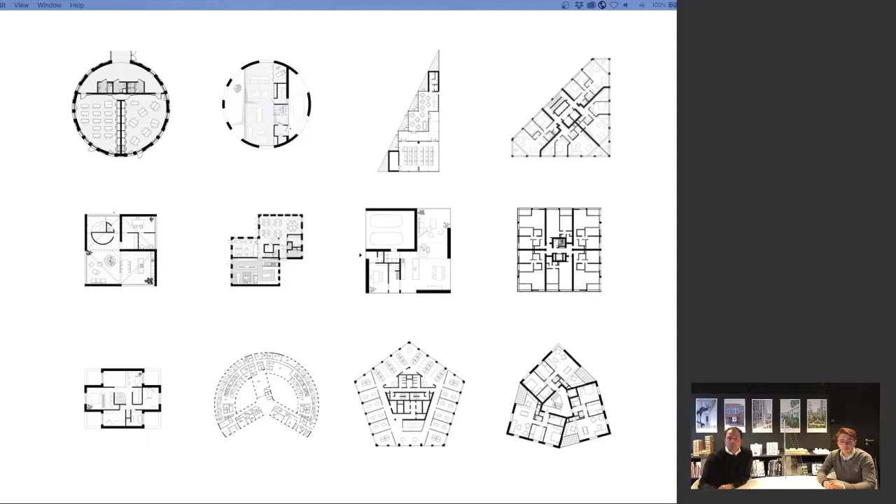So when we launched the office in 2012, we applied to 2 competitions. We won both, beginner's luck. One of them was the extension of a school in Bossière, a small village near Gembloux. The program was just to add 2 classrooms and toilet facilities to the existing school complex, so not too difficult.

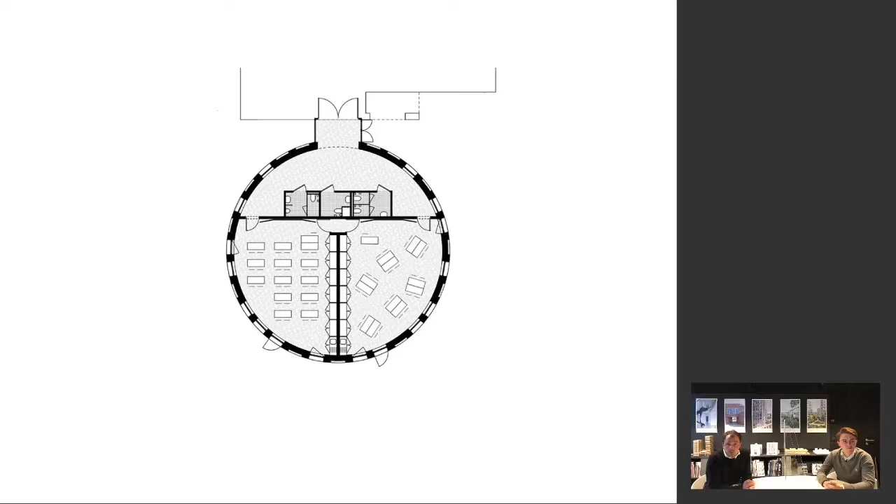As you can see, the shape of this extension is a basic circle. And to be honest, we didn't come up with this winning idea. The person who did was the officer in charge of the public procurement. Hello, Hubert. But you have to imagine a very serious guy, a technocrat who doesn't believe in fairy tales.

At that time, this guy could not imagine how his draft was so adapted to the context, and we couldn't imagine how he would contribute to our practice with this radical form.

Obviously, the shape offers many benefits. It offers the most compact form possible, the circle. It leaves more space to the external courtyard where children can play and run around the building.

And finally, inside, the curve also participates in the pedagogic scheme. It focuses the attention of the children on the board and of course on the teacher.

Another project with a geometric approach is the Left Side business park in Charleroi. The project has the ambition to become a new landmark in the city, the literal translation of the metropole with a big M, creating an urban theme.

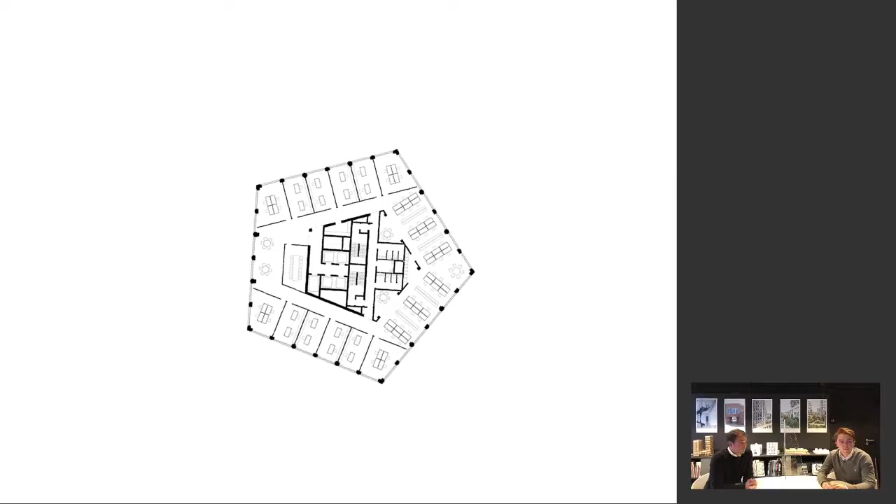Also, the 5 facades instead of 4 in a rectangular plan allow more offices to take advantage of natural light.

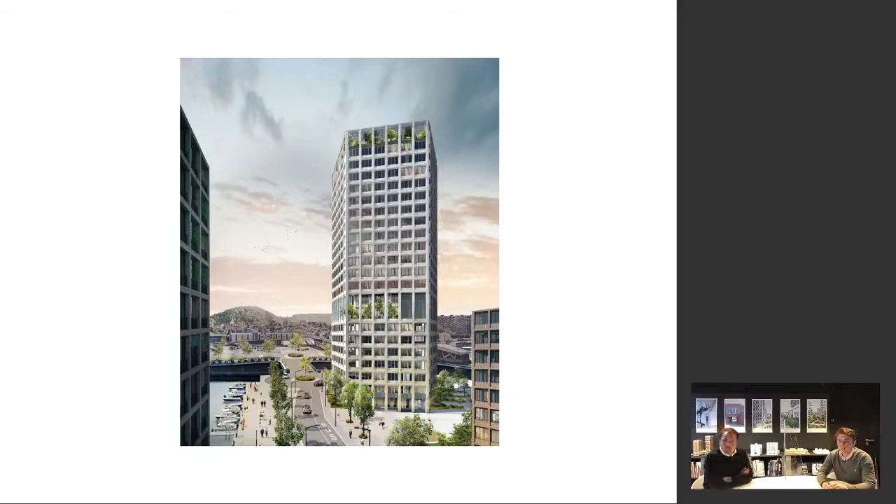The second typology is actually a triangle for the residential program. It is inspired by the Carolo shape of urban plots. So the benefits of such typology are the fact that every apartment gets a view over the marina.

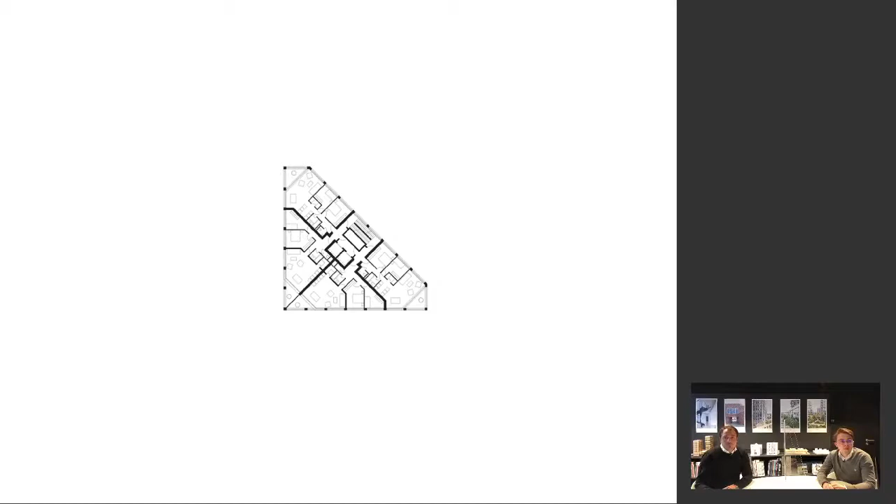Taking a look at this postcard of Charleroi, nobody could actually imagine that we are in Charleroi. So it's actually a good example of render manipulation.

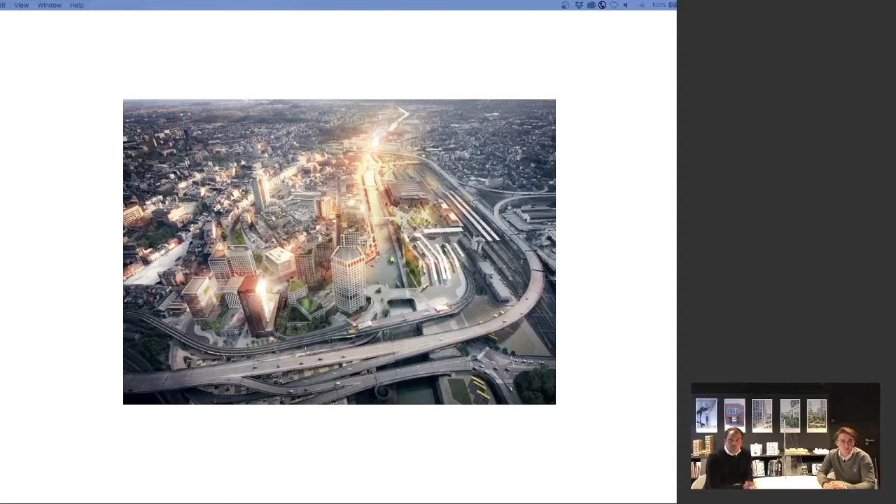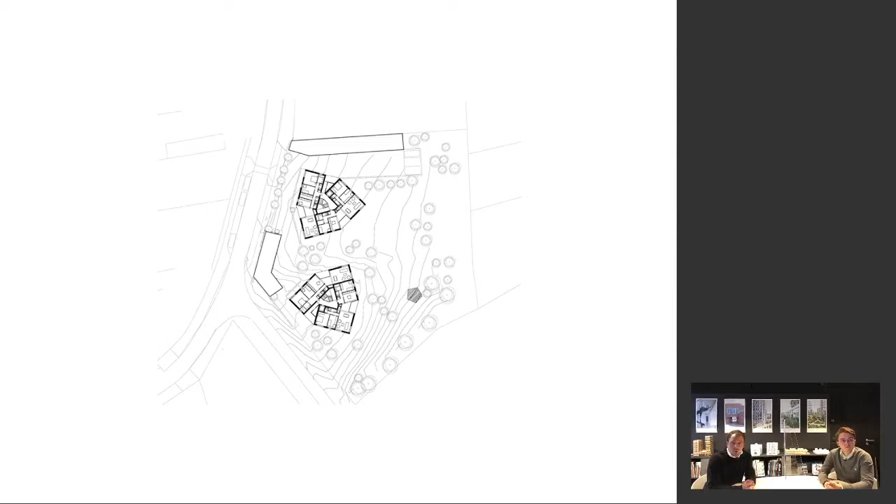This project is at the junction of two territories, the village and the countryside. The program consists of 2 blocks of 14 apartments. And once again, we use the geometric method to articulate this transition and offer porosity between these two territories.

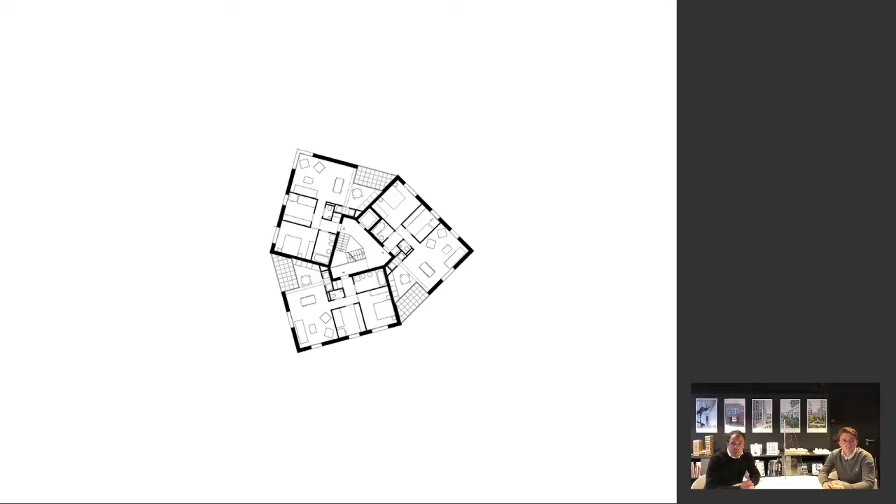But also, we were quite aware of the consequences of using such a complex shape on building the site. So we decided to soften the angles by changing them from 120 degrees to 90 and 150 degrees.

It allowed us to retrieve a certain orthogonality in the floor plan to ease construction by using prefab slabs. It also provides better habitability, and it's clearly easier to put furniture in a rectangular room, you know.

The opening of the building is only visible in the living room, which gives a specific dynamism to the space. And finally, to conclude this project, the geometric work in the central core creates an impressive space flooded with natural light.

In our case, we share the vision of Antoine Picon saying in French, 'si l'ornement a lieu d'être, il doit apparaître évident.' So it means that the ornament, as approached by the office, has to appear as an evidence.

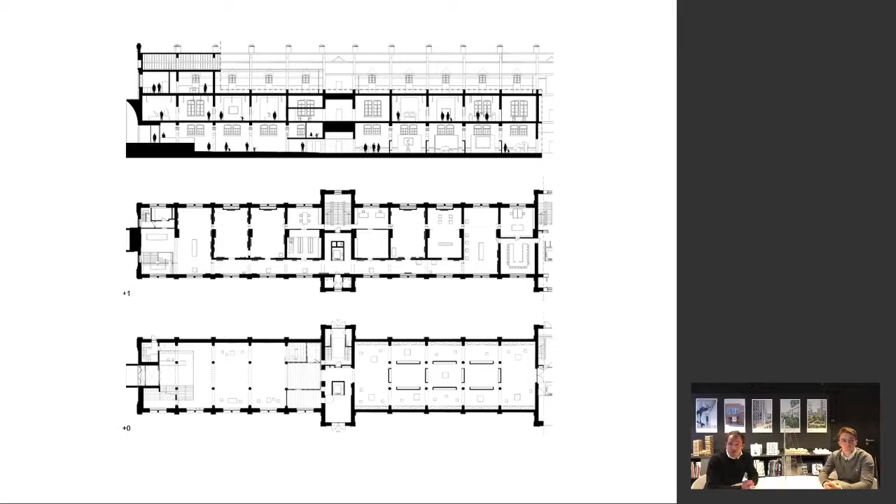Two features define the context of the project. The existing entrance of the heritage building, which didn't face the street, and the imposing presence of the police station designed by Jean Nouvel and MDW, which shines as a lighthouse over the city.

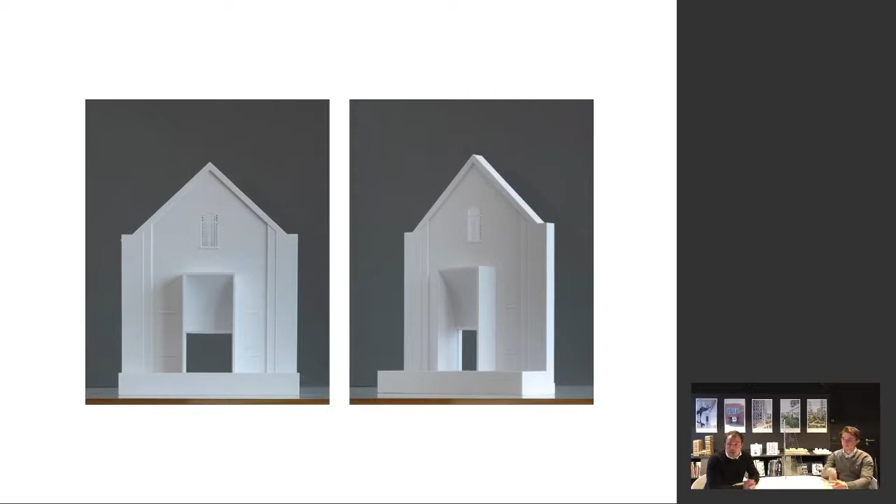We decided to draw a new entrance to give the building a strong image and establish a new relation with the public space on the street. A few years after winning the competition, this choice was confirmed by the deputy mayor when he told us that...

...for once we will not enter a public space in Charleroi by its rear, which is the case, for instance, with the town hall.

This entrance is directly visible from the street, instead of sharing it with the esplanade of the police tower. This door is actually our only intervention on the facade.

This important and exuberant entrance gave the opportunity to create a new monumental staircase inside. This intervention allowed us to reorganize the floors inside, previously independent from one another, to make them dialogue with this new grand staircase.

This approach provides real connection between the old stables on the ground floor and the first floors. The layers which were previously stacked up now overlap.

The project for the new headquarters of the Société Wallonne du Crédit Social in Charleroi is a good example of this type of approach. It's a winning project for a public bank that we conceived together with Meta and RGPA. The building is composed of 6 floors dedicated to the bank and 1 for social housing.

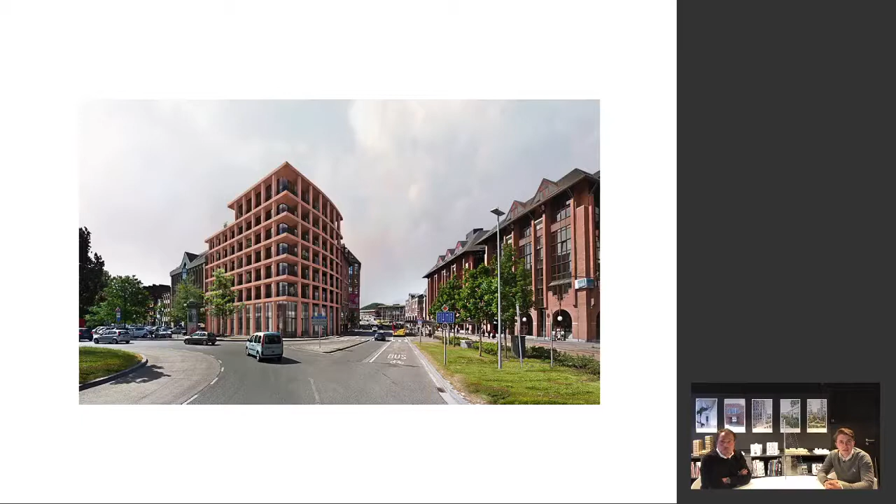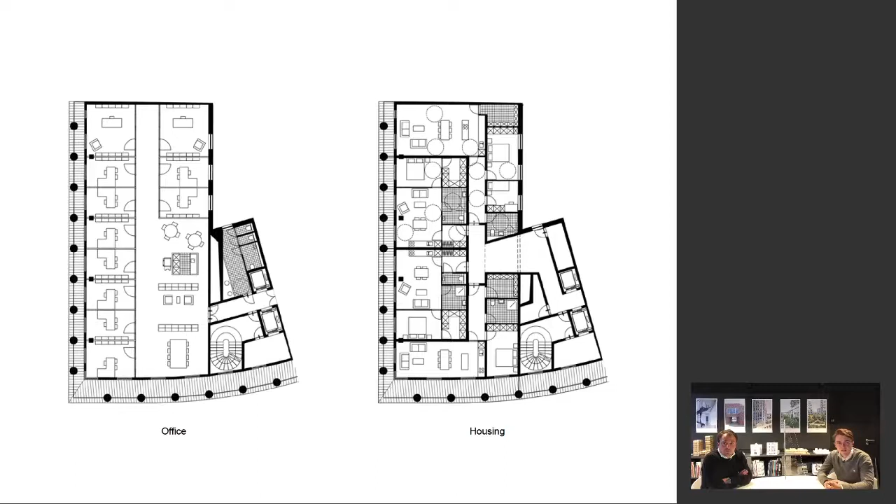The new building is approached in an ornamental way, using the same brick color to respond to the postmodern context around it, a style shared by a lot of public buildings in Wallonia. The ornamental dimension of the project is also combined with its great functionality. Maybe the architectonic shape of the building seems evident today, but the real partnership with Meta clearly helped us approach this sensitive conception.

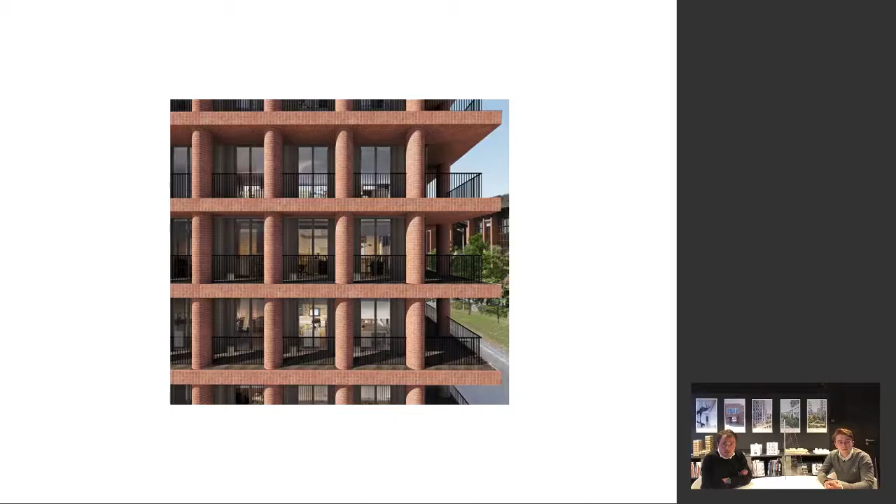To fit with the surrounding, a peristyle was imagined along the facade, playing with porosity and transparency, and also integrating public equipment into it. Somehow this aspect defines the social purpose of the SWCS, which is a social bank, in opposition to traditional financial institutions that are much more closed.

Finally, the facade doesn't take account of the variation of the program. It offers the same ornamental consideration for the bank and also for the social housing.

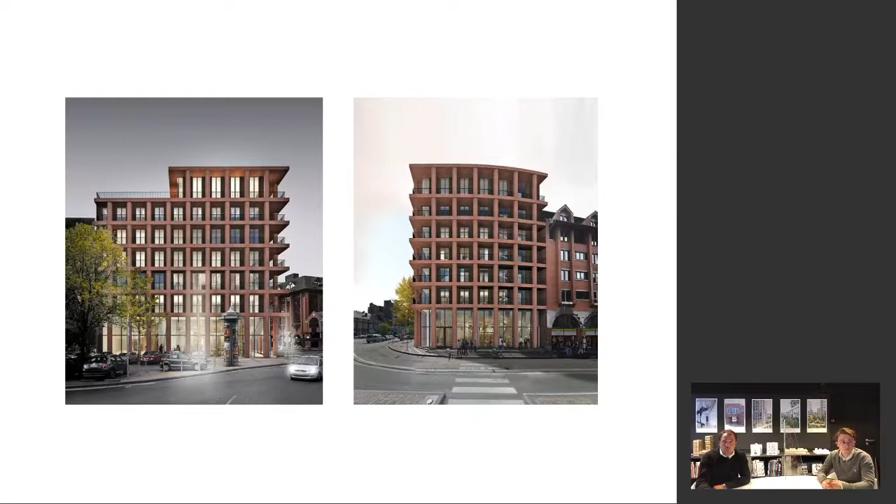This project of collective apartments takes place in Malonne, in Namur. The requirements of the project imposed us to complete the initial private housing program with social housing. First of all, it's clear that the project and its plan seem quite basic. However, it's the diversity of the program that we found interesting, despite the promoter's first purpose, meaning profitability.

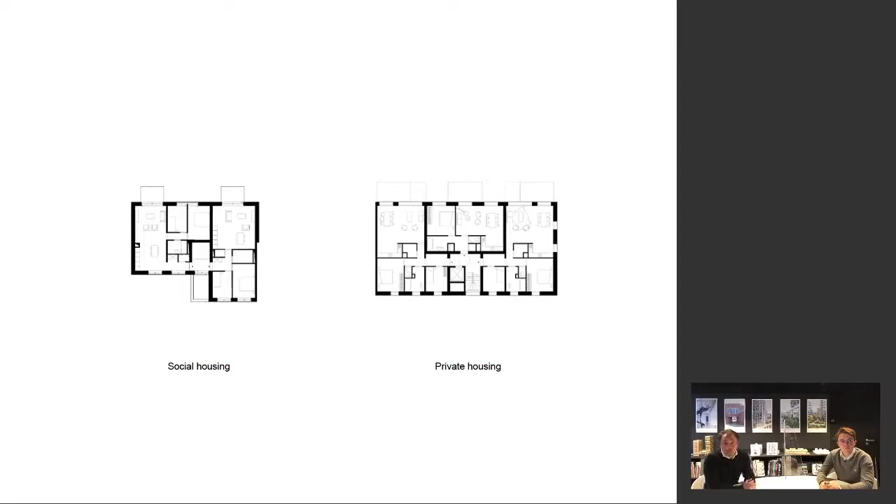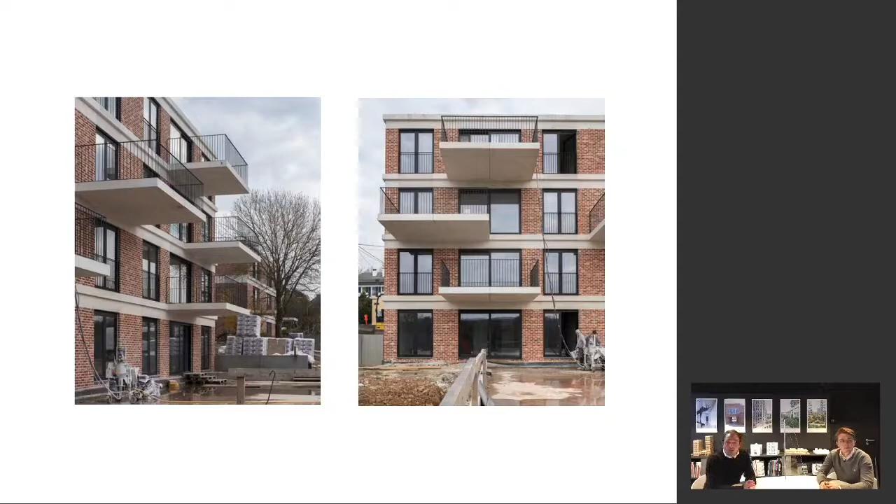Hybridization makes a society more organic. So to give a bit more flavor to the floor plan, we proposed a small coquetry on the facade using a frieze. The slab nosing unifies the salient elements of the building, such as balconies, lintels, and so on. It was important to us that both buildings, no matter their programs, receive the same coquettish touch. It aims to bridge the gap between the social disparities of its inhabitants.

The developer didn't consider the existence of these elements before starting the construction, as usual. At the beginning of the project, he just wanted the building permit to be granted. So when he figured out about these ornamental elements, he just wanted to put roughcast external coating instead.

It shows in this case that collaborating with developers often requires continuous negotiations, give and take, to find the balance between architectural value and financial profitability.

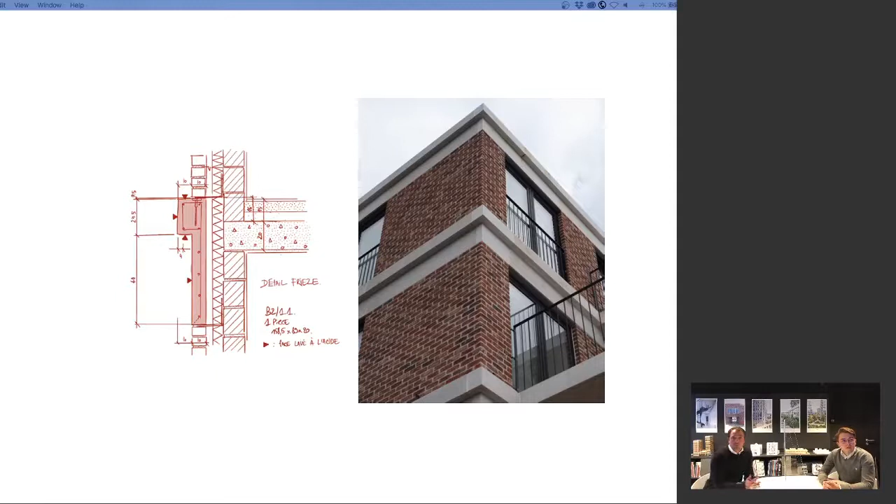This third approach defines the sensibility with which the office works in Wallonia, especially in highly traditional and conservative areas. Though vernacular architecture might be perceived as contradictory, because vernacular is by definition an architecture without an architect, focusing more on the specific geographical and social needs of a local group of people.

We use more of a neo-vernacular architecture that supports a more contemporary interpretation within a vernacular context. It defines an architecture that gets inspired by local traditions and uses actual technologies and aesthetic language to develop a more resilient response to a particular program in a particular context. This approach uses well-known archetypes which people can relate to and easily understand.

The kindergarten is located in Loverval, close to Charleroi. It's implanted in a particularly wooded and hilly area. The context of the kindergarten, both built and unbuilt, influenced many choices we made during the design. For instance, we used a double pitch roof as a metaphor for the surrounding context, but it was also, in this case, the most efficient concept to deal with the important vegetation around the building.

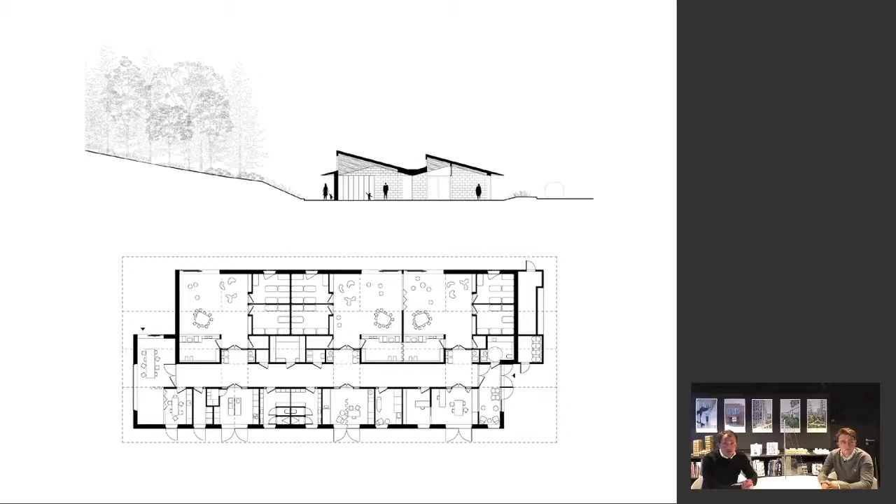As you can see in the section, we also drew large skylights into the roof to signify the presence of the hills in the living spaces. Thanks to the lower and upper windows, the children can at the same time perceive the roots of the trees on the ground with worms, and their branches in the sky with birds.

There was also an important frugality imposed by the design-and-build approach chosen by the commissioner, and once again there was no architect among them. So for the project, we had to prove that everything could work within a strict budget, and it led to a simple but efficient proposal, a simplicity that appeared in the choice of materials.

We only used wood and bricks that were very common in the surrounding buildings. Even though their arrangement seems logical today, we spent a lot of time on the layout to grant durability and flexibility to the building. In the end, I have to say this project clearly marked the beginning of a new chapter for this studio.

So the project for the gastronomic restaurant Le Chez Gourmand, which has won one star at Le Guide Michelin, clearly expresses this intention. The restaurant is located near Gembloux, a rural and agricultural region. At the beginning of the design, we had to deal with very restrictive and conservative urban regulations.

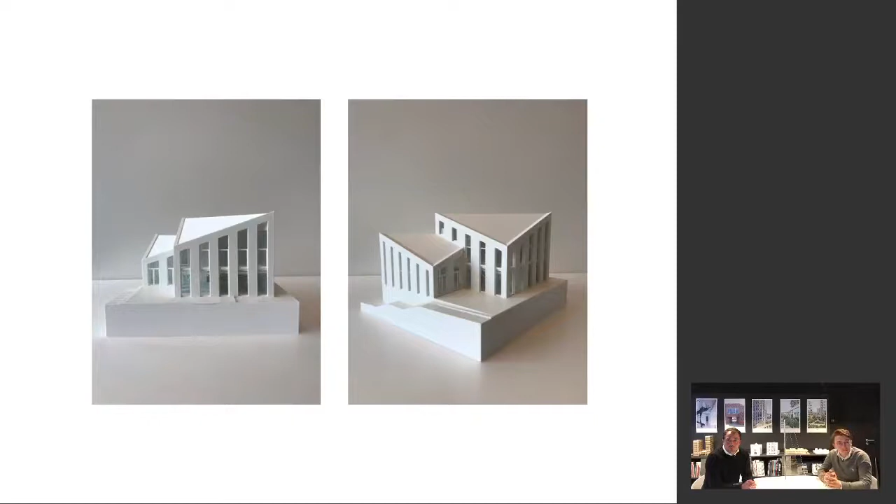However, we decided to respect these rules and we played a bit with them as well. For instance, we rotated the roof by 45 degrees to increase the dynamic of the volumes. The timber framework induced by this manipulation also contributes to the acoustics inside the space.

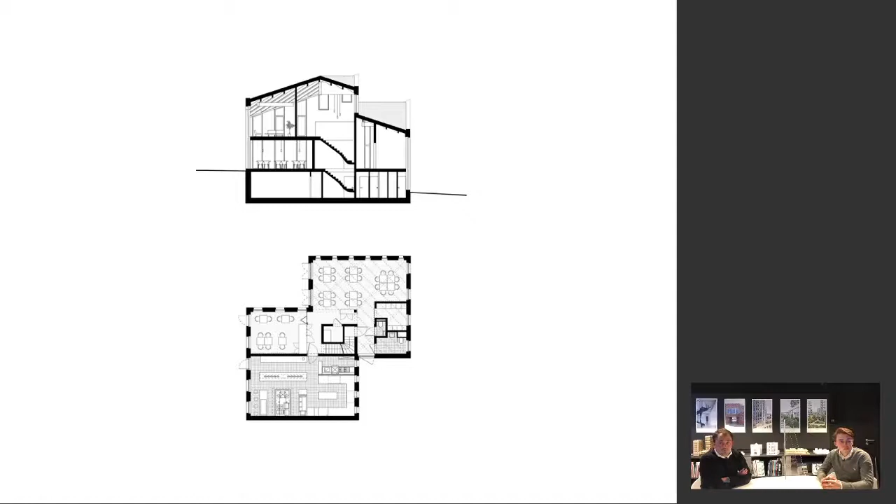Also, the facades were made following the ratio required by the urbanistic rules, which led to the, let's say, temple aspect of the project. Somehow, the neo-vernacular approach is clearly identified in dialogue with the rules. It reinterprets, in this case, the romantic vision of local architecture.

Another project involving vernacular or neo-vernacular characteristics is our recently built salt warehouse in Houffalize, in the southeast of the country. This region is marked by an important presence of agricultural and commercial typologies, like farms, hangars, commercial zoning and so on. So our approach was to reinterpret the code of those typologies to give a singularity to the project.

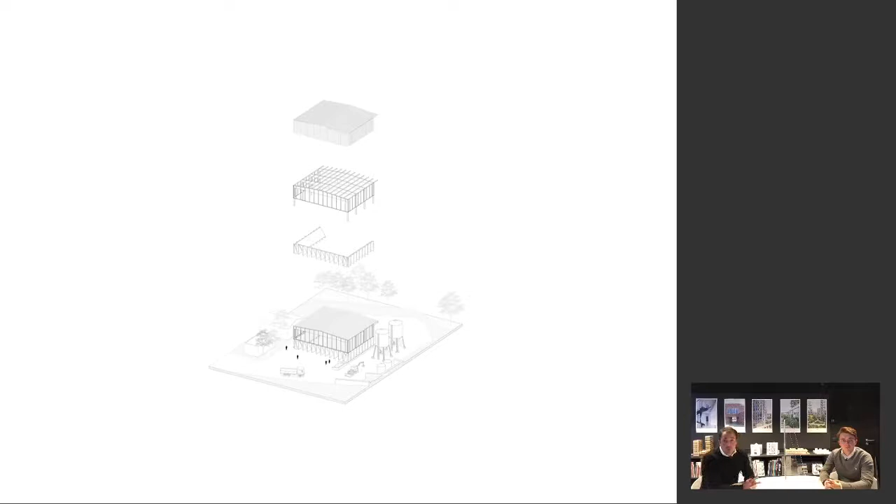Building a warehouse is mainly about the structure, and its imposing dimensions are somehow softened by the use of polycarbonate. Polycarbonate, in this case, has very interesting features, such as translucent and reflective capacities. It also integrates the structure into its environment.

So we also decided to create a wooden structure as a reference to the silviculture typical of the region. Thanks to its great size, the project plays the role of a landmark on the Houffalize landscape.

Furthermore, storing salt is not so easy, you know. This implies taking into account its important corrosive power. This is why wood was chosen, considering its efficient natural answer to such a context.

In the end, designing a warehouse implied an important frugality in a design-and-build approach as well. It's just a roof and a structure supporting it. However, it's this particular simplicity that gives the entire sensibility to the project.

But this time, something went wrong with this project. Since the users moved into the building last fall, they didn't understand this simplicity. At this moment, they are sealing the construction on every side with profile steel sheets. But we are still figuring out how to fix it, and once again, this requires a lot of energy for us.

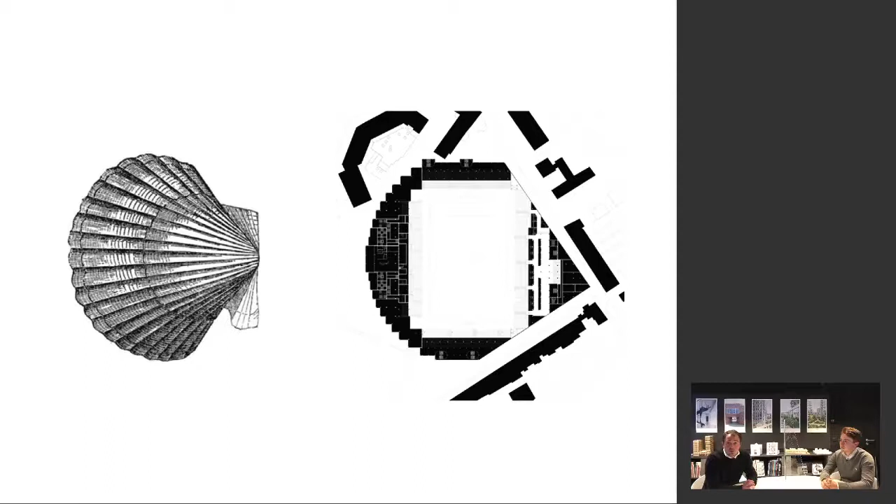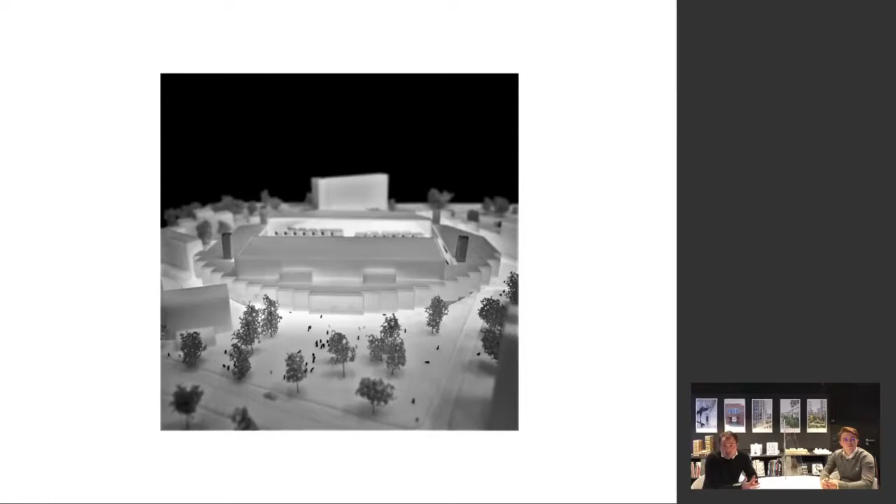So the concept was introduced using a strong mental image to express its visual identity: the shell, which can open during matches to connect the collective area of the stadium to the public area of the street. But this comparison also expressed the volumetric response of the project to the duality of the site—the smooth facade connecting the low residential typologies, a street with attached houses, and then the facade deployment over the esplanade to act as an important public landmark.

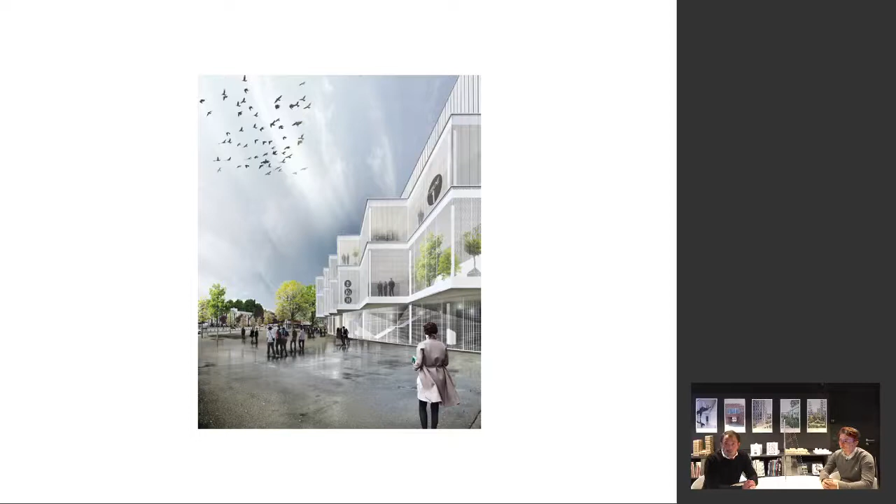This project is located in Tamines, in the municipality of Sambreville, between Charleroi and Namur. It's actually the last competition we worked on, and we are still waiting for the results. The program was to reconnect three public buildings in order to extend the capacity of the existing cultural center, and it was also an opportunity to improve their energetic performances.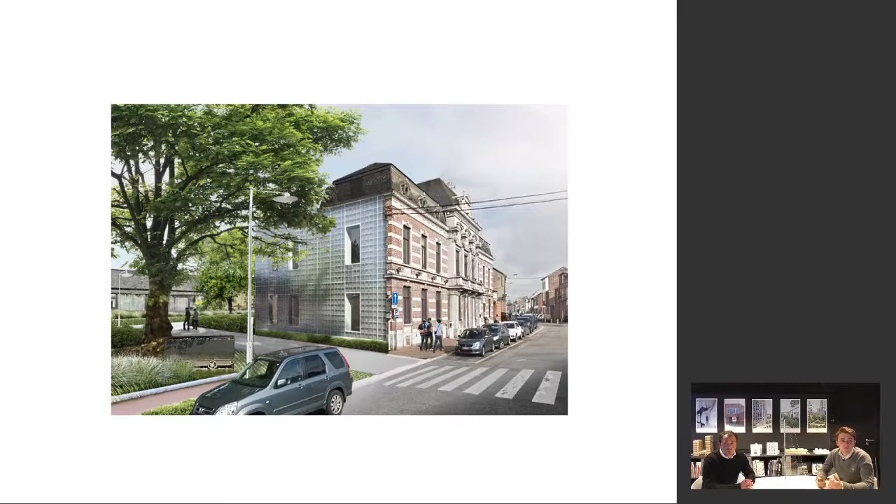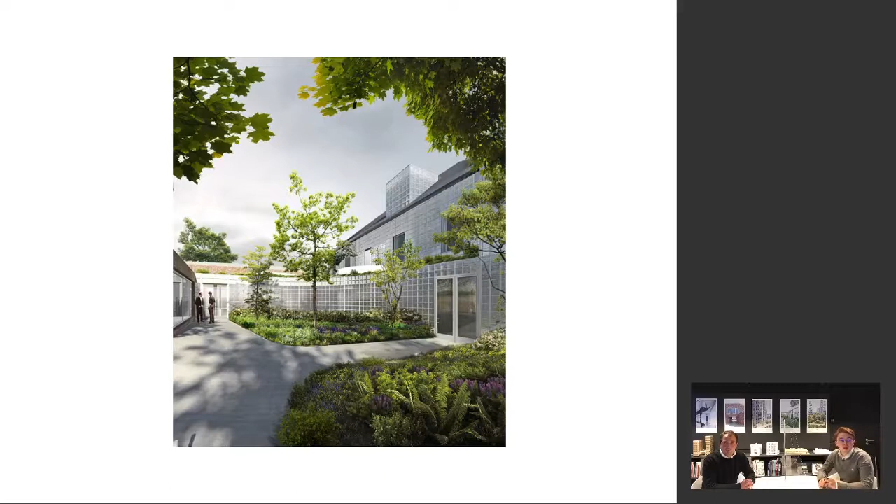During the initial site visits, there was a particularity of the windows on the ground floor that marked our attention, a pattern that we integrated into the final design. Our proposal was to reconnect these different styles both visually and physically without imposing another identity between them. Instead, the connection reduces the strong contrasts between buildings using an abstract organism that almost parasitizes the mutilated facades to retrieve a certain homogeneity while improving the energetic performance of the project. Finally, the glass bricks increase the evanescence of the junction via their translucent and refractive capacities.

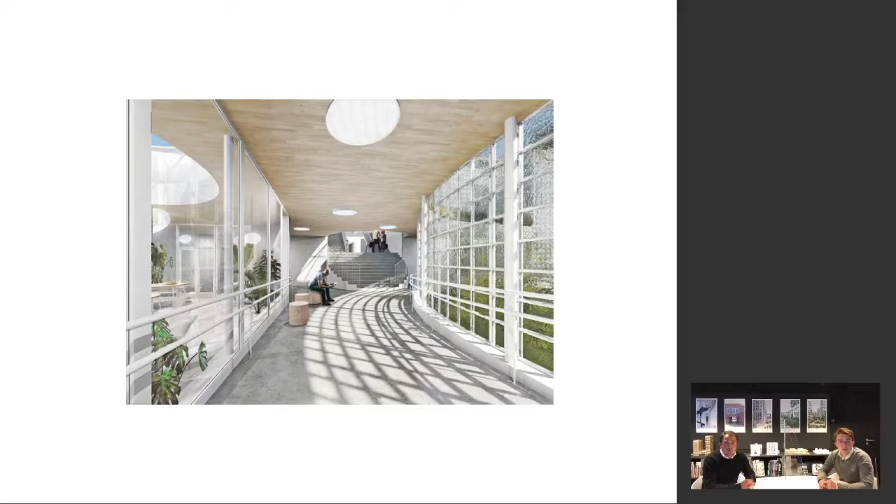This last project is actually composed of two. Both projects were for clients very dear to me—my mother and my two brothers. The particular nature of these clients gave us the opportunity to experiment with new typologies. It was like a life-size lab, and the guinea pigs, or the cobayes, were my family.

At the beginning, there was an existing house implanted in the middle of an even bigger plot in Somzée, near Walcourt. The purpose was to add a new pavilion for my mother and a new house for one of my brothers. So what do you find beside a country house? Well, sometimes you might find, for example, a garden shed or sometimes a high voltage cabin. In this case, we decided to apply it literally: a full wooden pavilion for one, and a concrete structure with green Chantilly rough cast for the other.

Obviously, it's a bit caricatural. However, it gives you an important mental image of what the concept, the story of the project is.

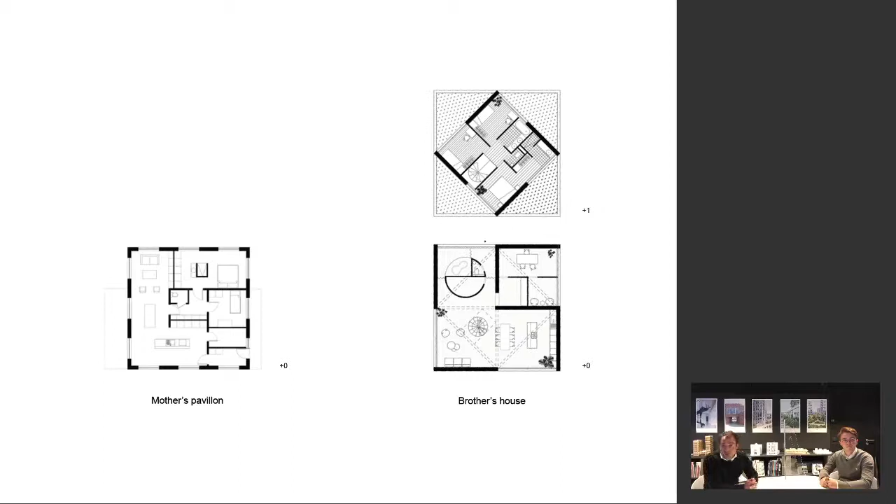The real challenge in this project was to define a new conception of living together while preserving everyone's intimacy and conferring a single identity, even though it's the same regular square plan for both projects—for instance, the facades are 11 meters long. Furthermore, to preserve their intimacy, we also implanted the pavilions at a 45 degree rotation from the existing house. Finally, a lot of thinking went into exploring the possibilities of both materials, concrete and wood, to propose the most coherent response without compromising on anything.

This last project brings our presentation to a close. We hope that this glimpse into our work has raised your interest and given you a better understanding of our practice.

And don't worry if your questions are too complicated for me to understand—Pierre-Loup and Peter are good lifeguards.